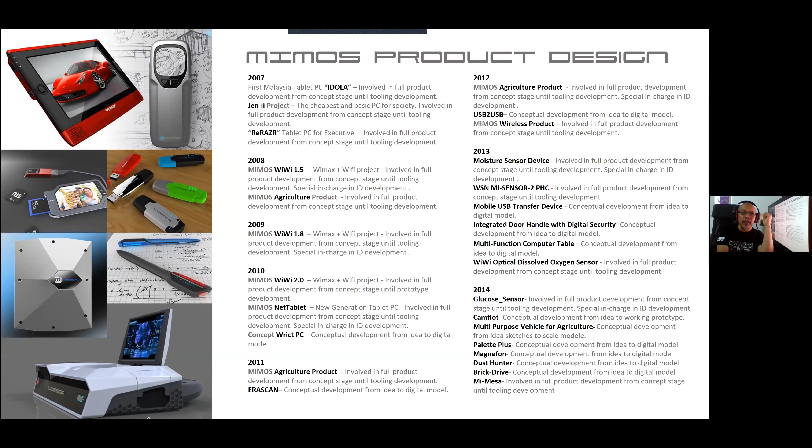A lot of product design. This is also MIMOS, but mostly concept design, not related to IoT, like a bag - just a normal bag, but a flexible bag. This bag received the Red Dot Design Award last time, in 2013 I think.

So other than product design and automotive design, at MIMOS we need to do everything. If they have a request to do interior design, yes, we need to support the interior design, and some architecture work.

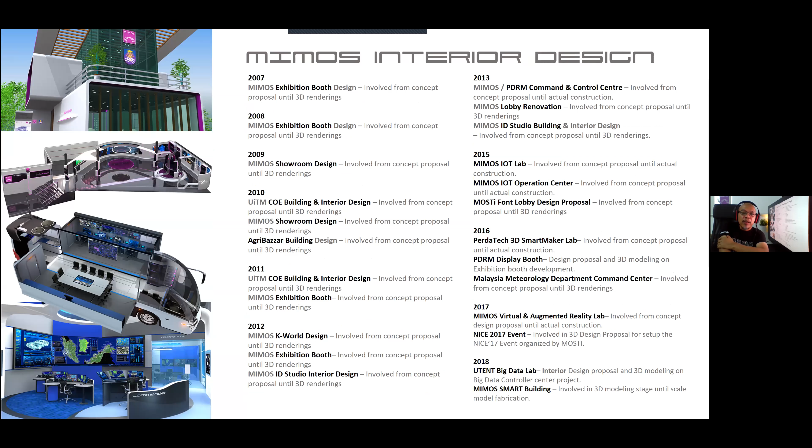For research publications, I'm not writing a full book or publication, but I support other people. They use my work for their publications.

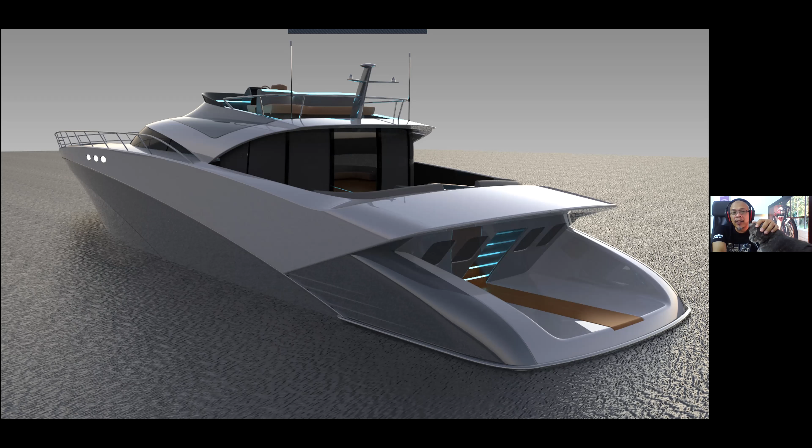All this rendering, I'm using a lot of Keyshot. If you are familiar with Keyshot, it's a good software, you can use it too. For me, I'm using Alias for 3D modeling, and also normally for rendering. I'm using Keyshot a lot, and sometimes VRED, which I normally use for virtual reality.

So this is also my famous design, a lot of people sharing this: the Mercedes sewing machine. Actually Mercedes already produced a sewing machine, I think 100 years ago. I don't remember exactly, but they were producing a sewing machine last time, so I just refreshed their design, but made it look modern with the Mercedes design clue, design influence.

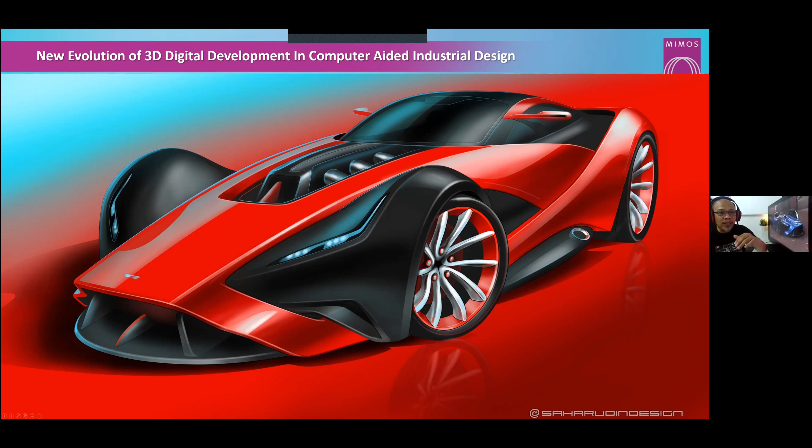Because now we have technology, I just trace the design. If you're free sketching, maybe it's quite difficult, susah. So let me show you the Autodesk Alias application.

Actually, you can use this for sketching digitally. Either you can use Photoshop, I think you're very familiar with Photoshop, but for me, I don't like sketching on Photoshop because I don't have the stroke, the stylus feel. One more thing, you can use Sketchbook Pro, but the problem is Sketchbook Pro doesn't have the 3D modeling tools.

So okay, this is the view for Alias. Actually, for your information, Autodesk Alias is free for students. You can download it, you just need your matric card as evidence that you're a student. So you can download it free and use it for 3 years. For your information, this software, the original price for the student version, the industry price, is 100K.

The price for the automotive industry. But for me, I'm using the lower version, Autodesk Alias Concept, but you can still use it to do automotive design, though it doesn't have features for A-class surface for production. This one also has a price, around 13,000.

Okay, so how to do it, this is the tablet. I need to flip the screen. If you look at the small window, I tip it. Okay.

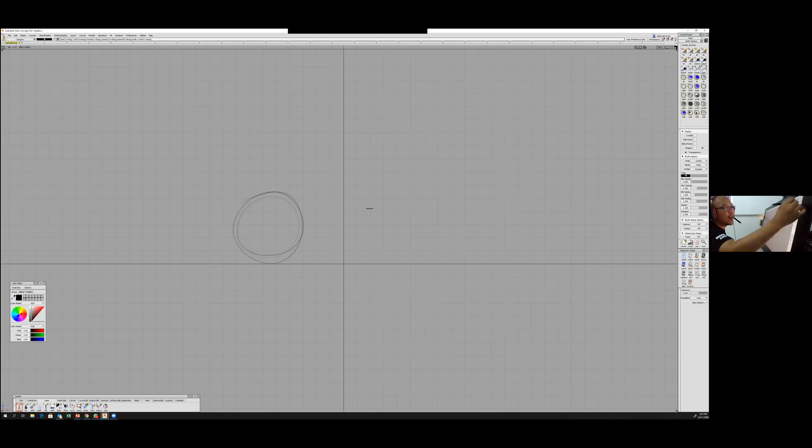It's now default, I can change to pen. Now the icon here already changed to pen. Window, edit, canvas - so the layer canvas layer editor, actually the tools are similar to Photoshop layers. So I can clear, I can create sketching.

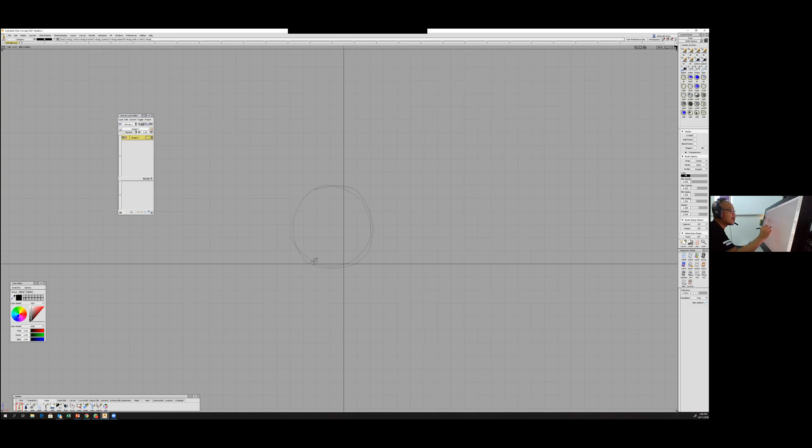Create basic quick automotive sketching, so you can sketch. For me, normally I just do the side view sketch first for automotive to get the idea, because automotive is a symmetrical product.

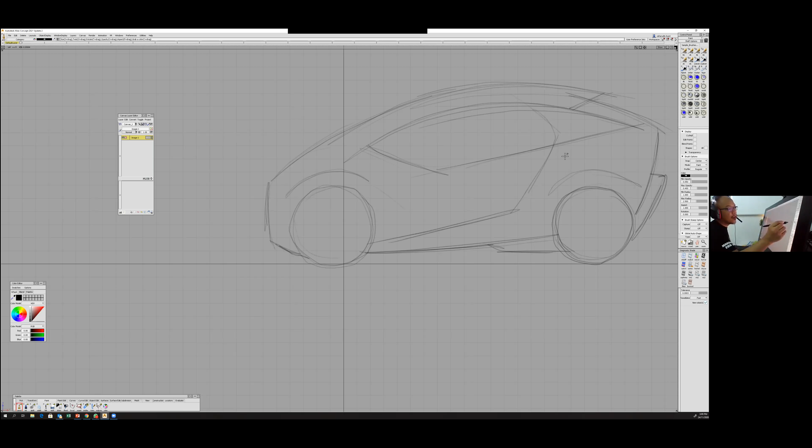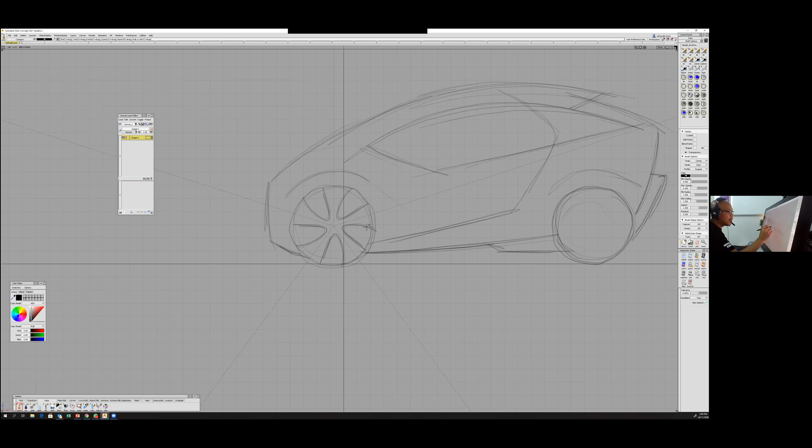So you see the door. If you want to make it symmetrical, bilateral radial, so number 5, I move this to center. If I want to make the spoke, make the rim, I copy to 5 sections. Sketch - so just one portion only I will draw, and the other sections will be copied automatically.

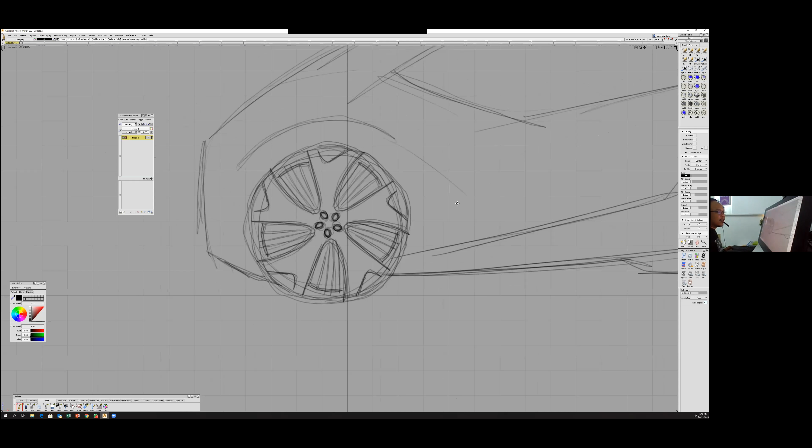Okay, if you want to turn off the symmetry, just turn it off. And then you can clone. If you want to clone, copy the rim, copy at the back. Okay, this is just the concept, so you can brush.

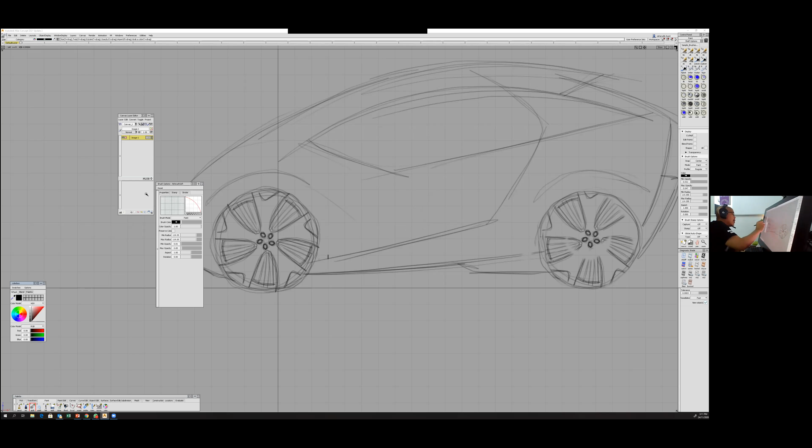Using this brush - this is the size, this is the color. You can color, and then put another layer, so you can color the glass.

Okay, so this is the side view. If you go to F8, the shortcut, actually it's the 3D environment in Alias. So from here, how to construct in 3D. Normally I'm doing how to make the perspective view - I will create some basic construction, then create the 3D sketching overlay from the basic perspective. In Alias, you can use curve.

So I create the curve, and then pick, move the CV. Okay, this is just the simple version - so I can hide it, I can reduce the transparency.

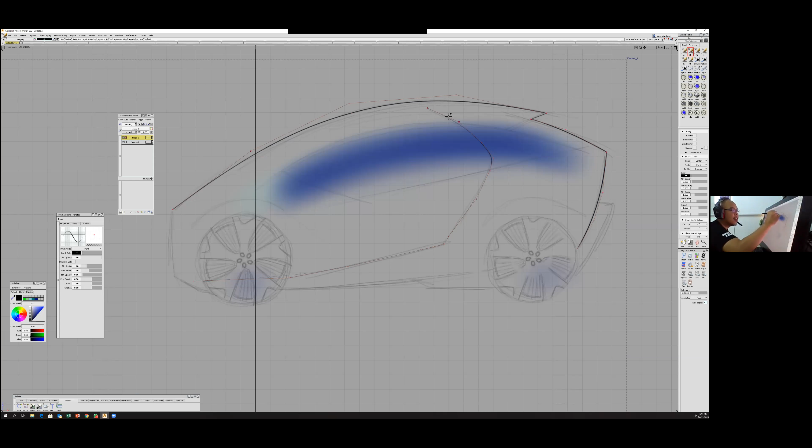Let's say if you want to make the door here, you create the curve, the path. So if I create a line, I can see snap to curve. So I create a layer, create this one inside here.

Okay, the line - next, if you want to make the highlight, still using the sketching tools, I change the color, then snap is still on. What's the function here? This center, snap to center, I snap to edge - so I snap on the edge, so it looks like it's sketching the highlight line.

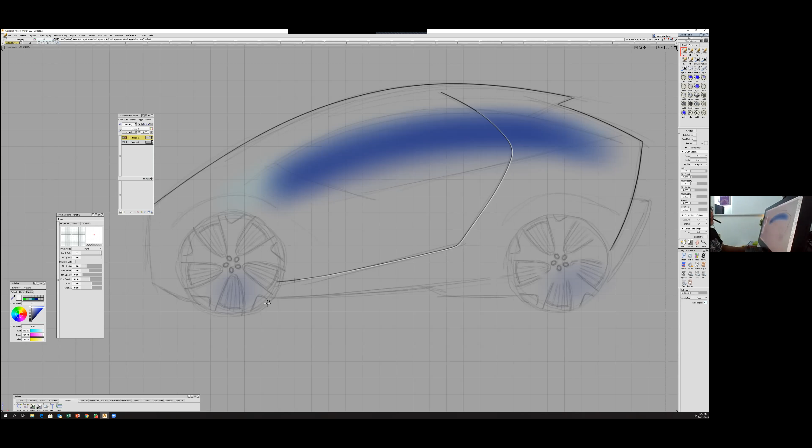So using the same curve, how to create the 3D - this is the basic fundamental in Alias. So I'm using...

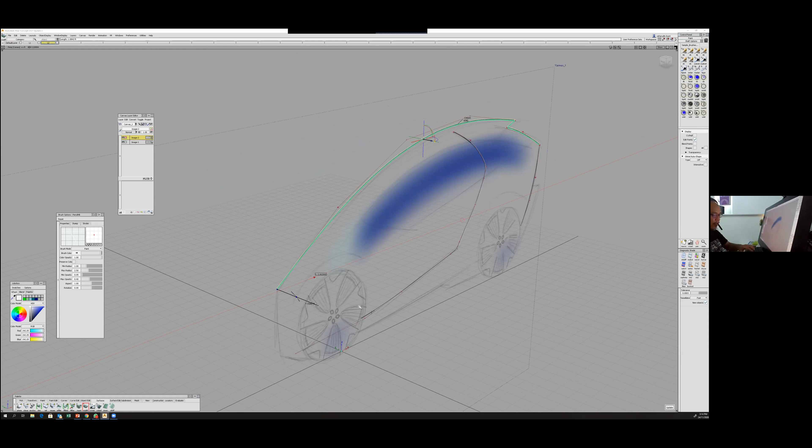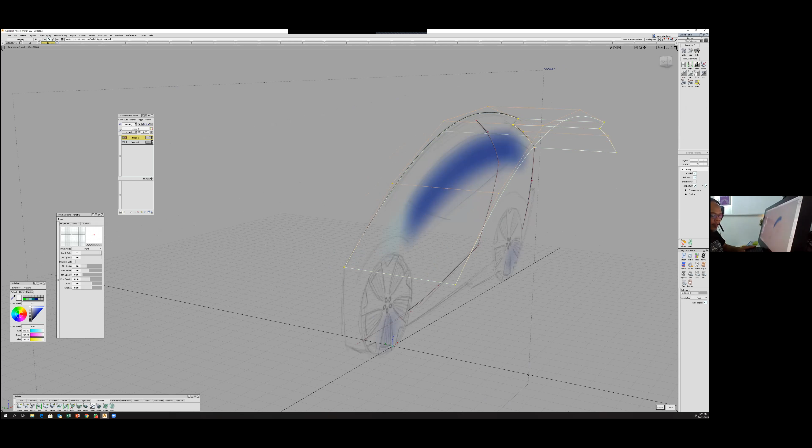Actually it's already now in 3D. I move to default. Okay, so I change to degree 3. Okay, so from here I move - oh, this one, the snap needs to be off. This one.

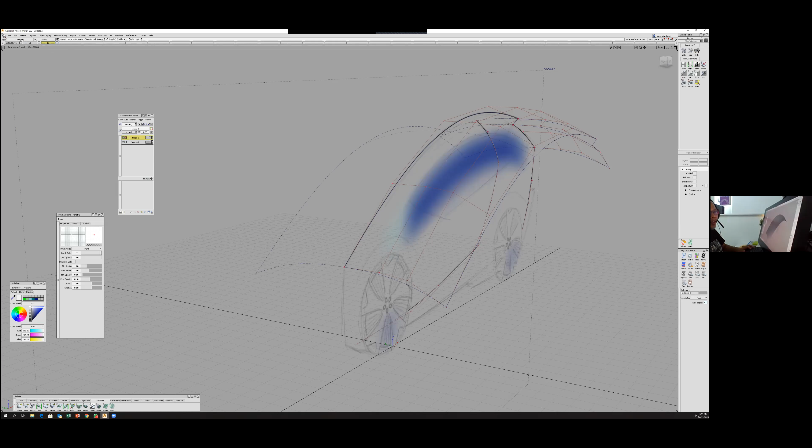So if I symmetry this, and then this is the shading - okay, actually it's already 3D modeling. This is how I construct all the model, my design from 2D sketch into the 3D. So if I change the CV, the point, the highlight also changes. The highlight checking. Okay, this is how basic modeling works in Alias.

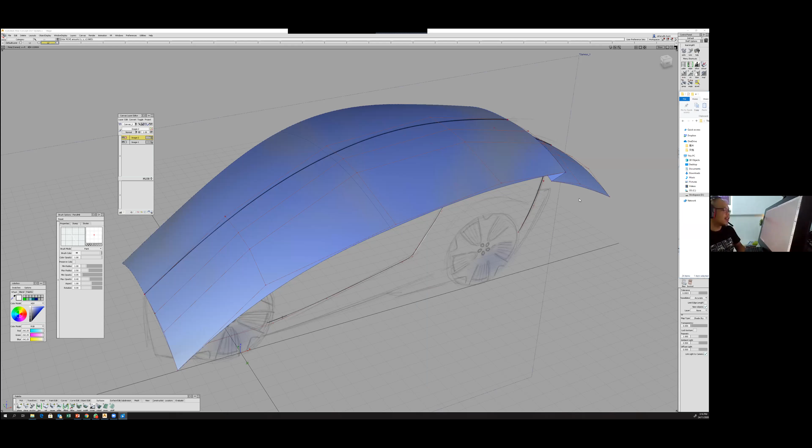You can see this is how I demonstrate from the last 2 weeks for my design talk. I construct first on sketching. I already cut the video, made it faster because of the time.

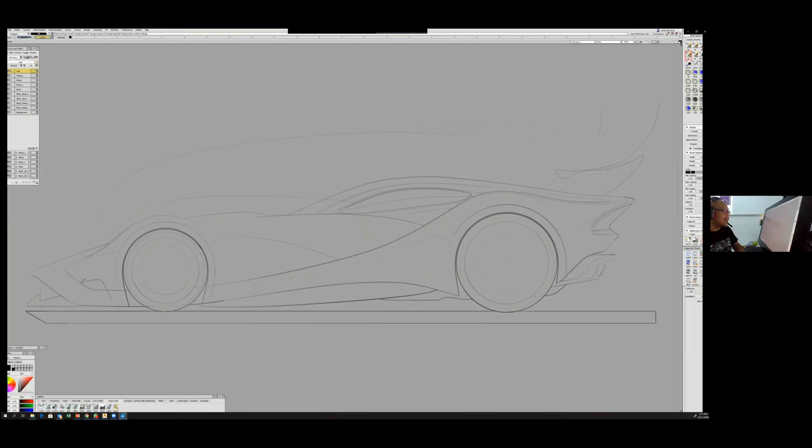So I start with the side view of the sketch. But remember, while you're doing the sketching, you need to consider the packaging. Packaging is the ergonomic consideration - the engine, the driver position, the passenger position.

And then you overlay using the sketching. See, now you can understand why my sketching line looks perfect because I'm using snap curve, snap tools.

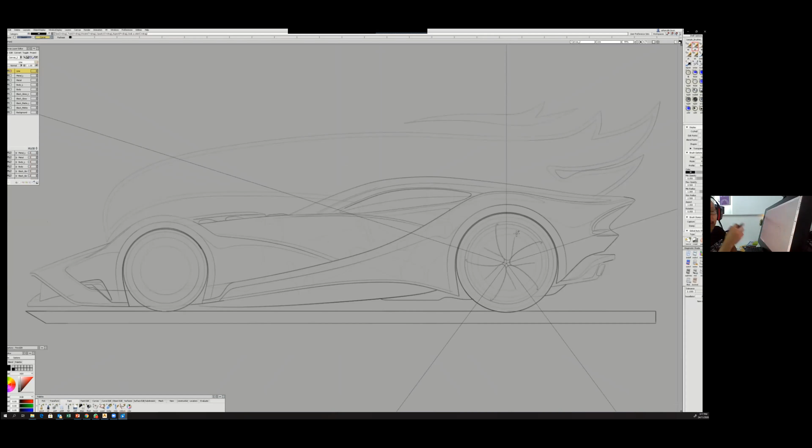So see, and then using the symmetry - bilateral symmetry, and this one radial symmetry. So you can symmetry the object using the radial.

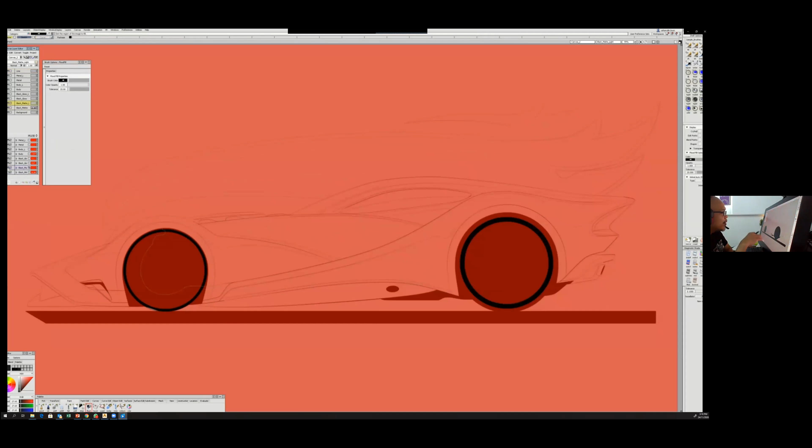See the masking - I didn't show you just now the masking features, how to brush the color. So I'm using the masking.

It's like Photoshop masking, but Photoshop has the issue - the problem is they have a dotted line. So I don't like that dotted line. So with this one you can hide the dotted line, so you can brush.

If you watch this, I'm not zooming in or zooming out, cursor-wise, because the size of the screen is already enough for me to do it like actual paper on paper.

So my brush technique is using the brush and then sketching. I made it a little faster. So I brush using this one, the body color.

I try to use a metallic effect - how to do the metallic effect.

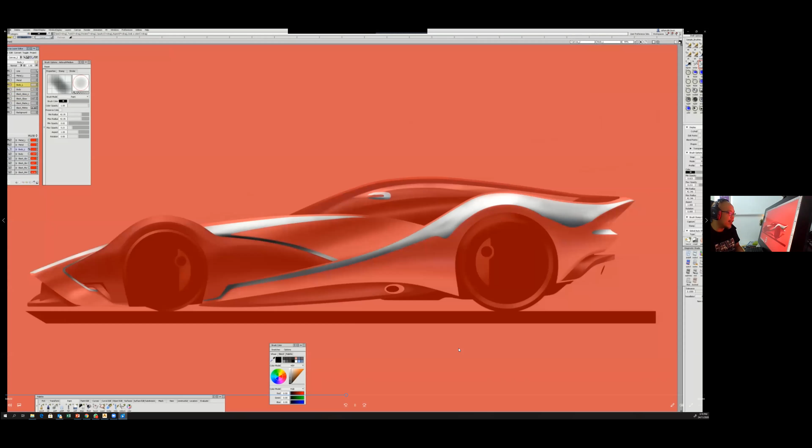And then the rim, using the masking there too. That's why the color looks perfect.

And then this is almost complete. Finally, I'm using the snap to curve to do the parting line. Now I'm doing the parting line, the edge, the radius, all the highlight lines.

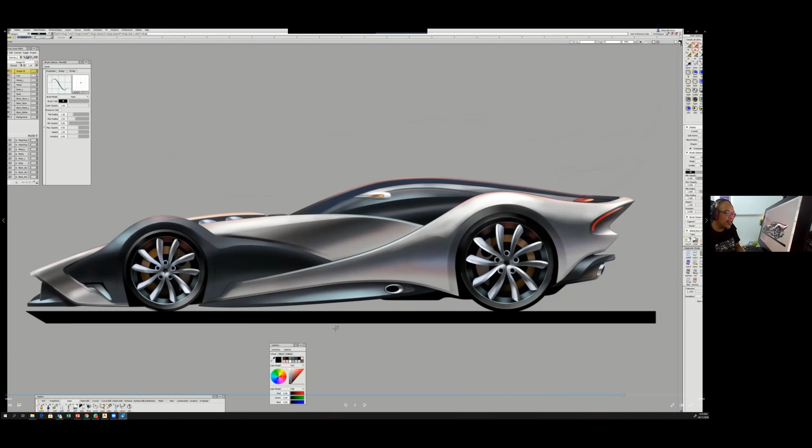Now the background - the brush is in the background.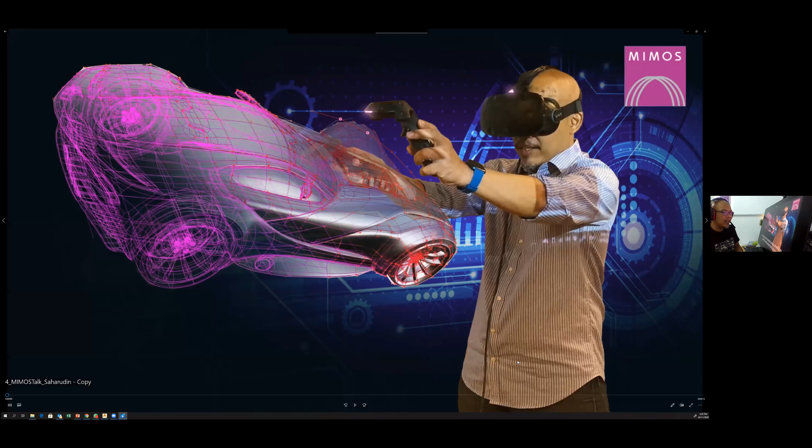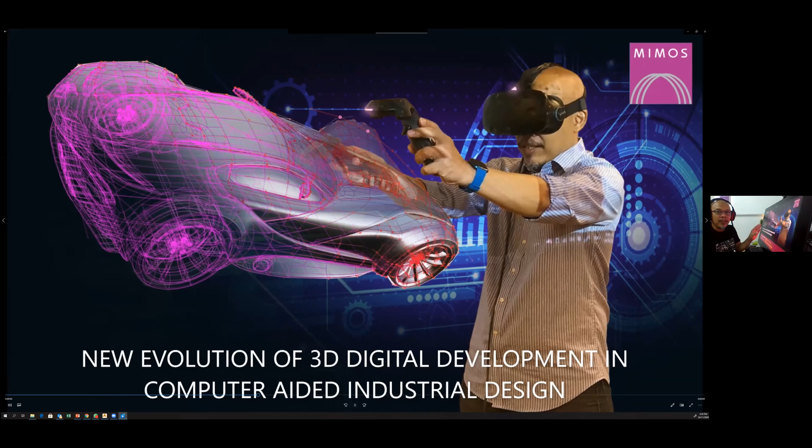So next, I want to show you a short video on how to transfer from 2D drawing to the sketch, how to make the 3D modeling.

So I retrieve the same sketching, but actually I did the sketching at 1:1 size, actual size, because the grid - everything - you can set it as 1:1 size. This makes it easy for me to do the 3D modeling using the actual size.

But this method I'm using for 3D modeling is different from what I showed you previously using curves - this is subdivision. So if you're familiar with subdivision modeling like Blender, Maya, or 3ds Max, it's easy in Alias.

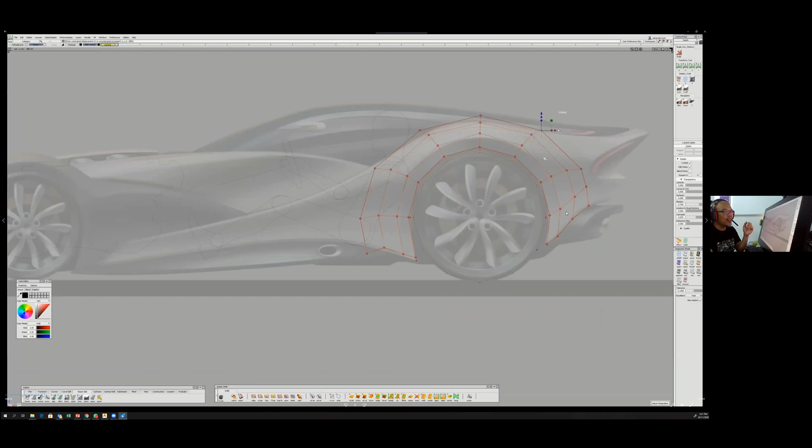For me, this is considered new for Alias users, but it's an easy and quicker technique.

So now, from sketching, how to construct the 3D modeling. This is the reference I'm using.

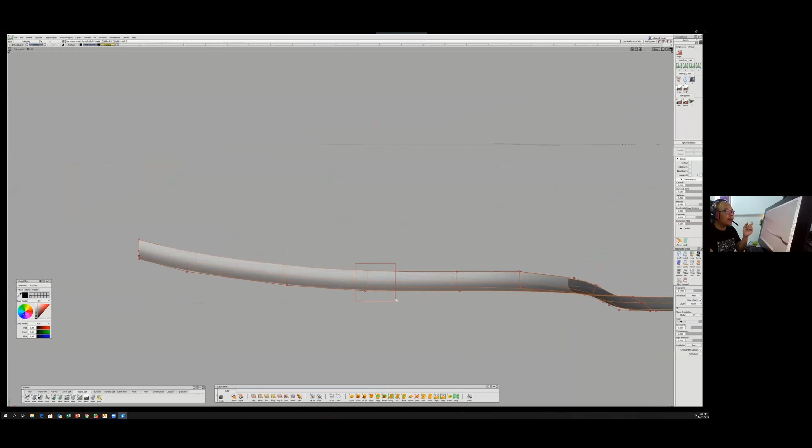But from top view, you also need a basic reference. For me, I'm already familiar with automotive 3D construction, so it's easy for me to do the 3D modeling without the reference. Only the side view is enough for me to do the complete automotive design.

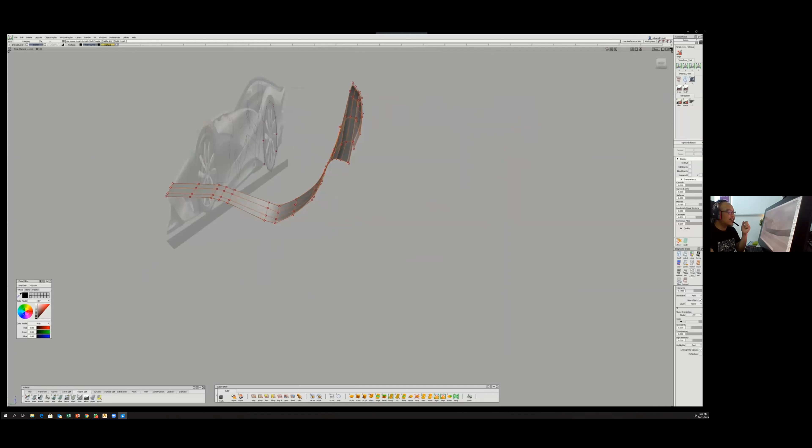So if you look there, sometimes it looks more boxy. In the subdivision modeling method, it's like that - the construction is slightly different.

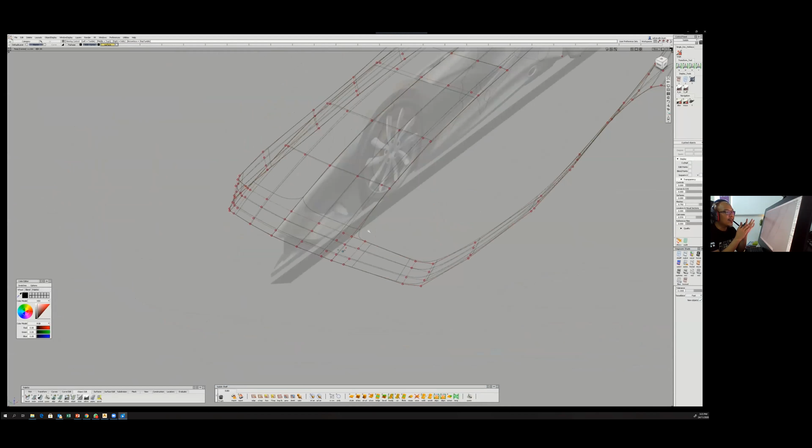I don't know, are you familiar with 3D modeling methods like this? Or I'm not sure. And I don't know what software you are using - either you are very expert in SolidWorks or what?

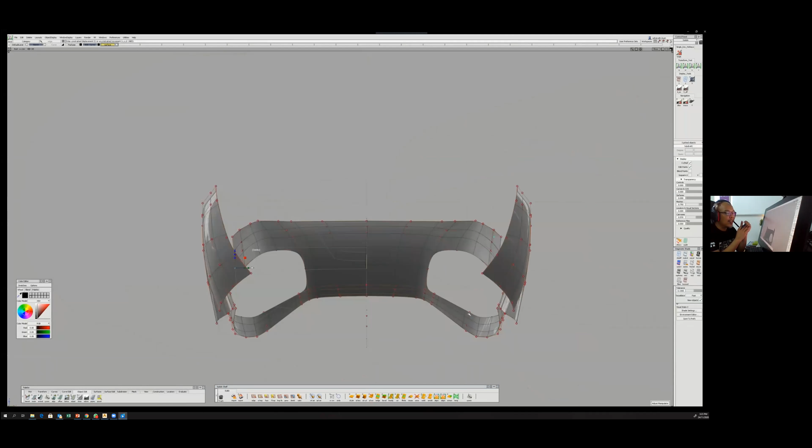Because if you want to do automotive design, make sure you are using the proper software. In the automotive industry around the world, they are using Autodesk Alias for conceptual modeling. For product design, yes, you can use other software like Rhino or SolidWorks, but for automotive design, you need to use Alias.

If you see how easy I construct the 3D modeling using Alias, then using this method, I make it faster a little bit.

Okay, so this is how to make the tail area. I need to stay - so you just concentrate on the left side, one side only. The other side is automatically mirrored.

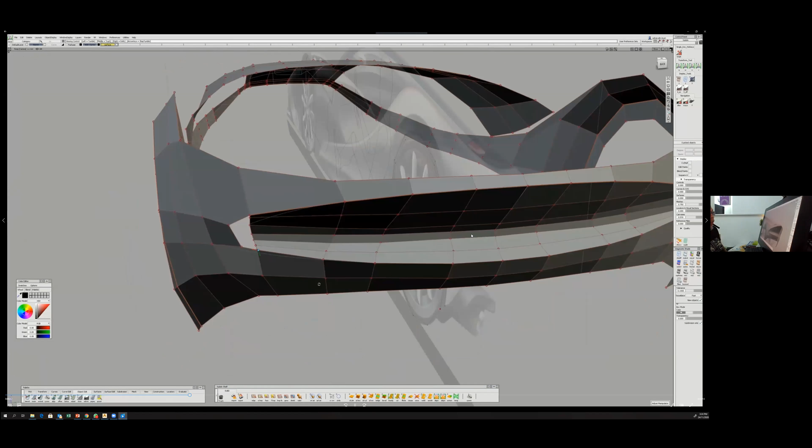So this, I want to make the intersection close. This is the tool - subdivision tool, the palette. And I make the cluster a little bit.

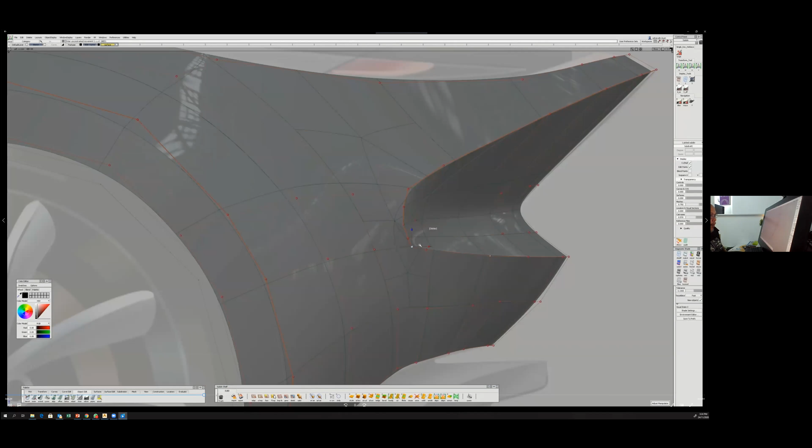Okay, now I do the mirror area, the glass area, side glass. See a lot of pole CV - pole points, the points we call control vertices, CV.

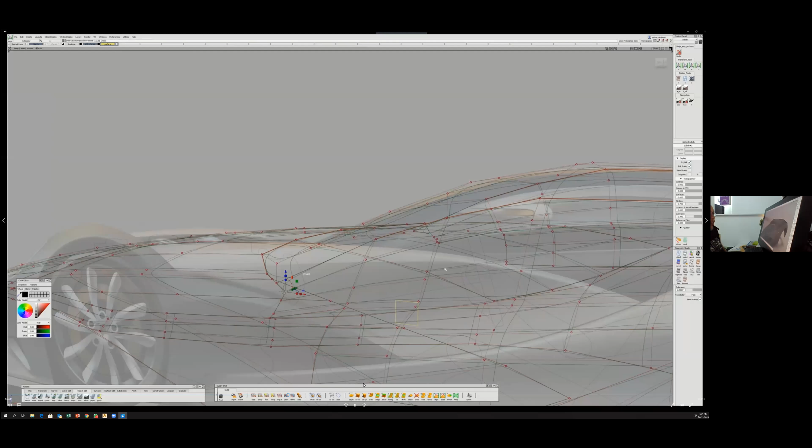Okay, a lot of adjustment, and then okay, so this is still the modeling stage.

I want to skip - okay, this is still modeling stage. Okay, this is almost complete.

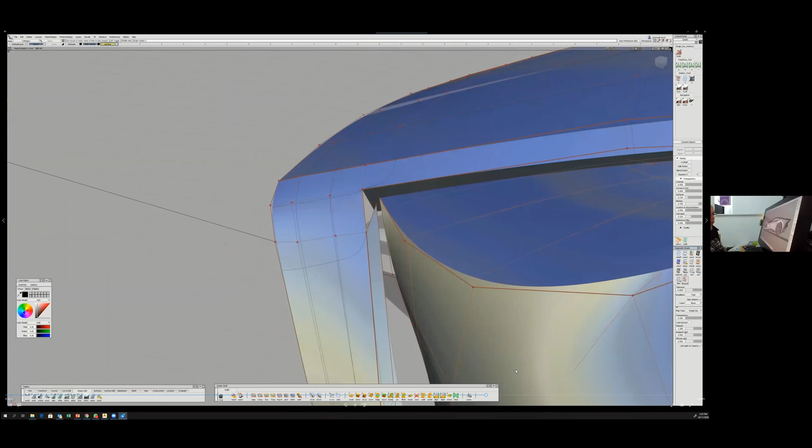Make the corner - the detailing on the corner area. So it's like a sculpture activity.

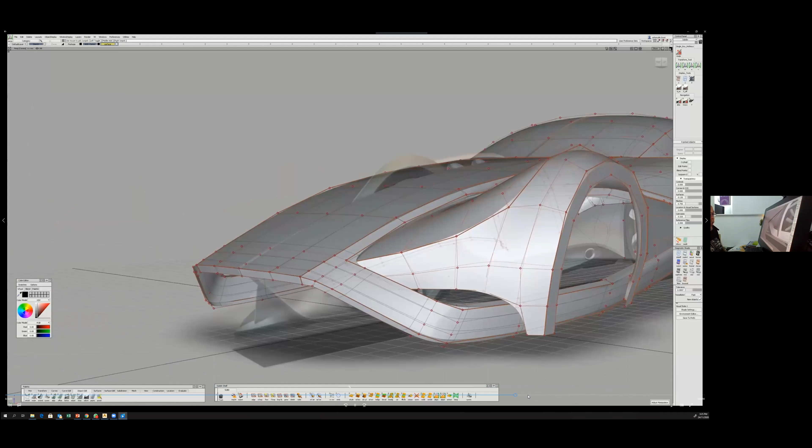So in Alias there's also the advantage - either you can use a manual modeling method like this using mouse and screen, or second option you can do it in VR, virtual reality, but you need a device.

So if you look at the top on the menu, they have a VR, virtual reality technique. So you can do the 3D modeling in VR.

That one is a better experience because you are doing it at one-to-one size, a real car. Right now you're just using your screen to do the modeling, but you don't experience the real one-to-one car.

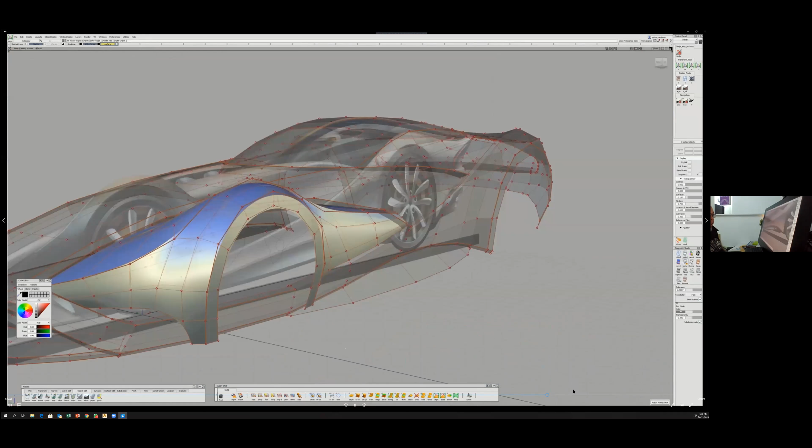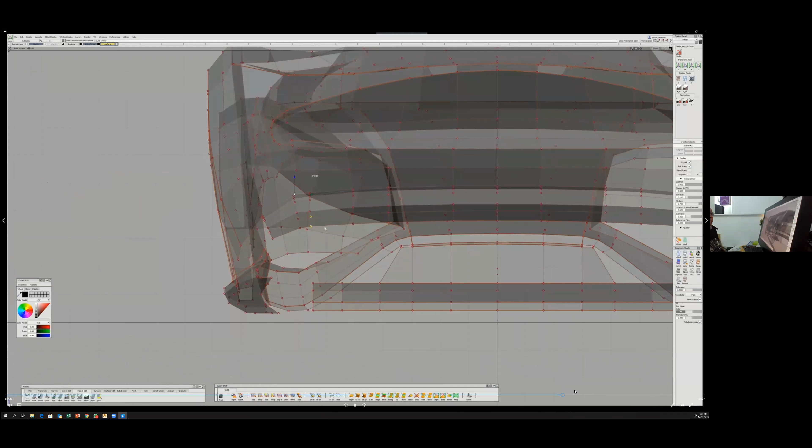If you want to become an expert like this, you need a proper class. Just watching YouTube isn't enough. You need a good lecturer, a good teacher to guide you, because it involves a lot of practicing and coaching.

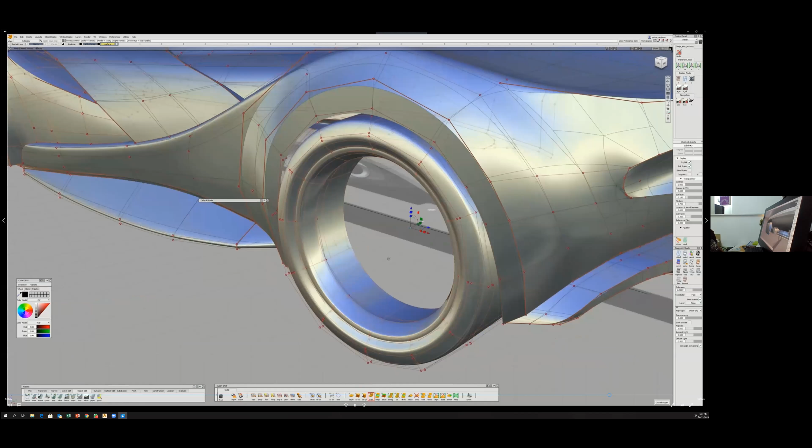So this is how I make the rear diffuser detail, and this is how to make the wheel, to close that surface. Then how to make the spoke. Just now you watched the sketching, but this is how to make the 3D modeling of the spoke.

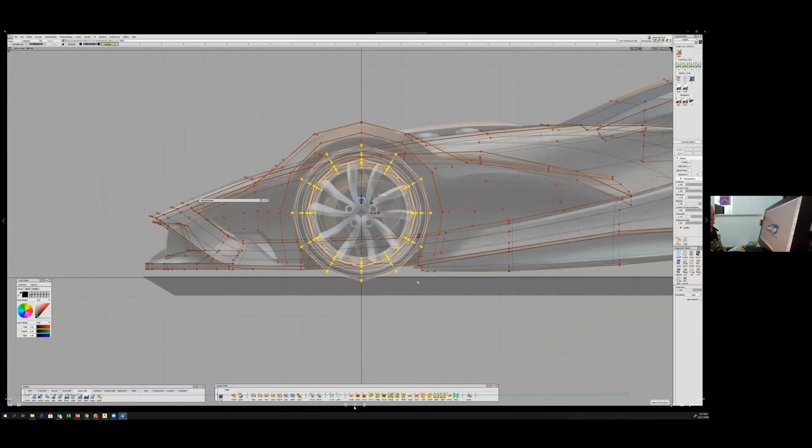Before I create the modeling for the rim, the wheel, this is one of the main features. So now the basic 3D modeling is almost complete. Next step before you proceed for detailing and finishing.

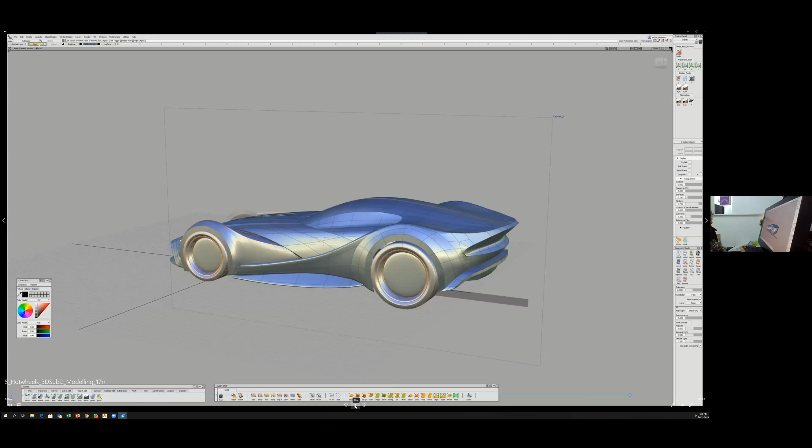You can project your 2D sketching onto the surface. Just now you did the side view, you can project it on this surface, so at least you can view it visually before proceeding to the next development. See, I project from the sketching onto the surface. Now the sketching is projected on the surface, and you can review quickly before starting the next development.

So it's important for you to decide whether you're okay with this modeling, or whether you want some alteration or modification.

This stage, I think, as a student, will be good enough. For me, to complete all of the car, I need 2 days to complete.

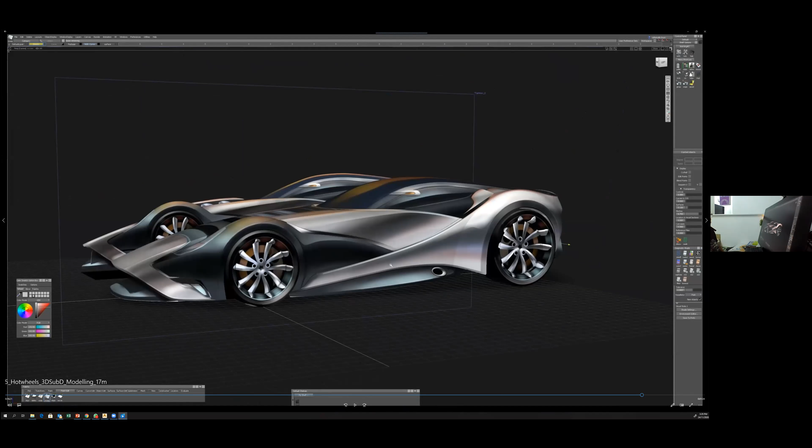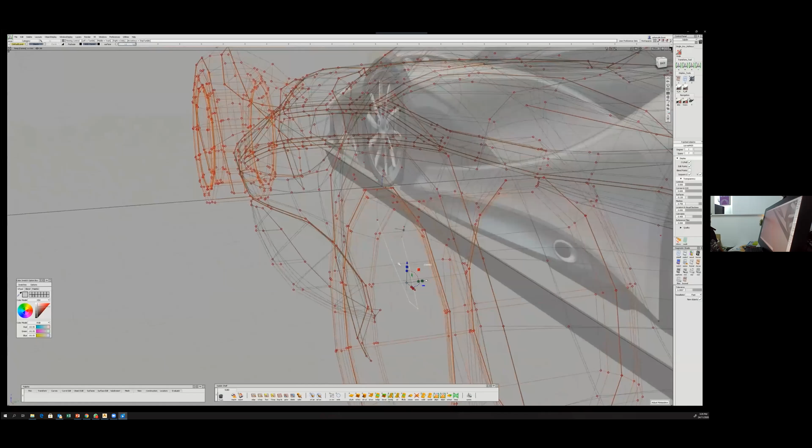So I proceed to create the spoke. Before that, I just project the sketching, so now I decide the spoke is okay. I create the spoke for the wheel, the rim, still using the subdivision modeling technique. I just copy, and then you change one side, but the rest you repeat.

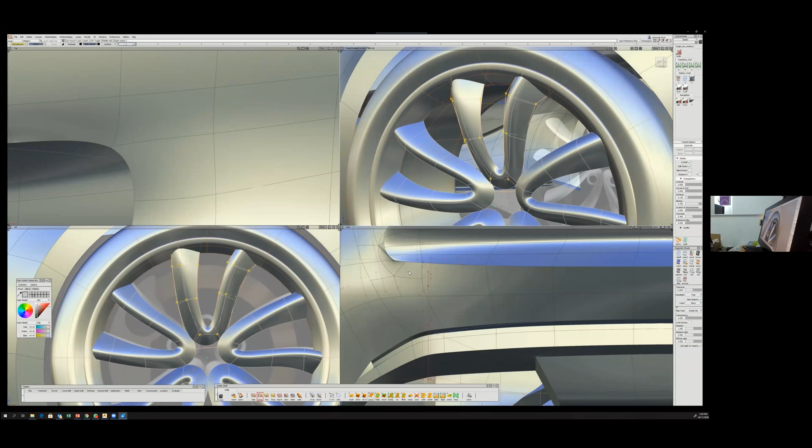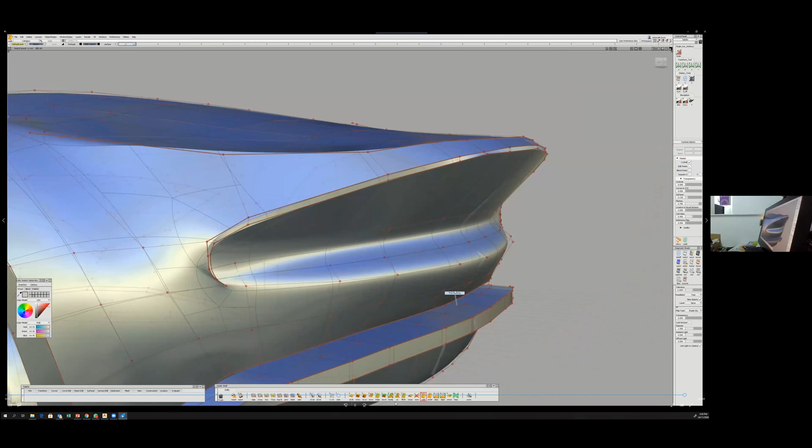So almost complete the basic modeling. So how to make the corner, the edge, the radius. This is to make the finishing, the detailing, but you need to understand all the tools.

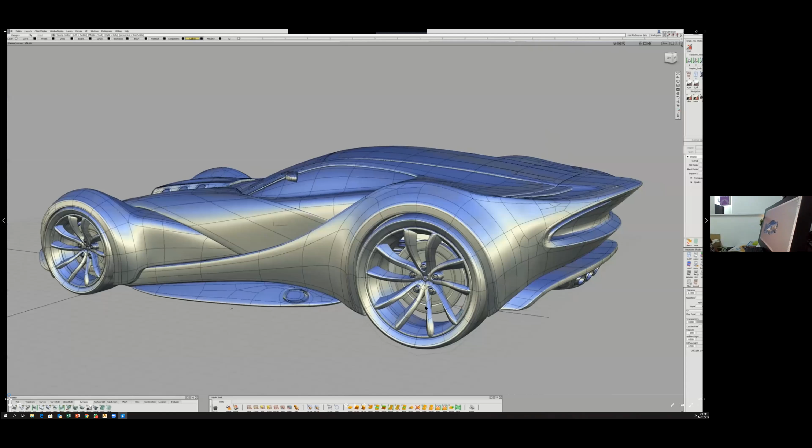So this is the final. I already skipped some of the process, but this is the final 3D modeling. See the detail: the exposed engine, the light, the wing mirror, the tail light, the rear light, the exhaust.

So this is how I evaluate before I proceed for rendering, how the surface finishing looks, the quality of the highlight. You need to check everything, whether it's perfect or not. This is okay, now you proceed for rendering.

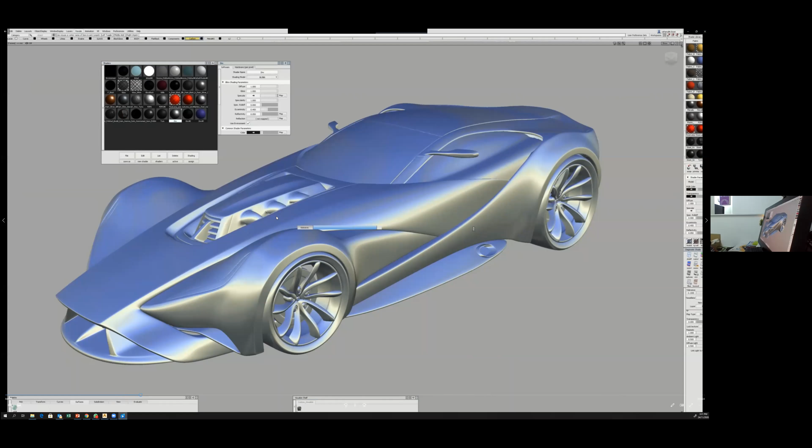How do I make all the rendering look realistic? So this is the trick: I start from Alias, I assign all the material in Alias. After completing all the material assignment, you can export to other applications.

So this is assigning the material. This is the VRED software. In automotive, this is an important tool, an application for reviewing in VR, virtual reality. You do the animation and rendering.

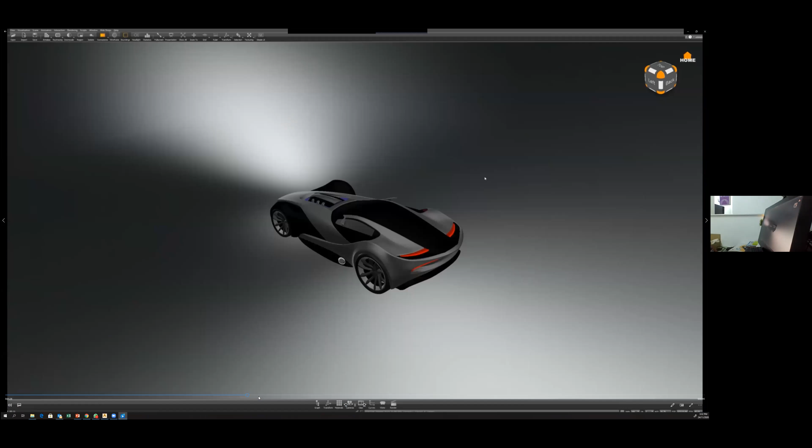So how do I transfer from Alias to VRED and KeyShot? I'm not sure about KeyShot, because to do VR it's better in Autodesk VRED. So this is the data from Alias. I changed the color tuning a little bit, and effects like a carbon fiber effect, more features, more material, and the HDRI environment.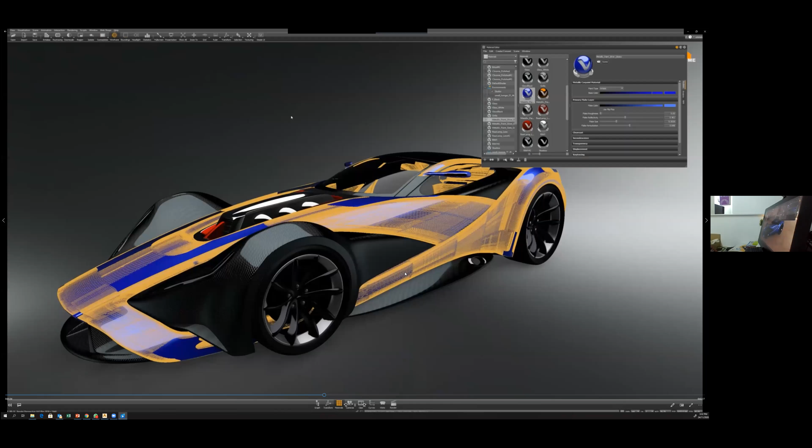I can use the HDRI environment to blend with the color and environment. You can retrieve the environment here, we call it HDRI environment. You can just download it from a free website like HDRI Haven, or use a free application, but it's still high quality.

So you can change the color, orange.

And this is how I view the VR at my house, using the HTC Vive. But actually you don't need the big screen here, the big screen is just for other people to review with you. For yourself, you just use the VR headset.

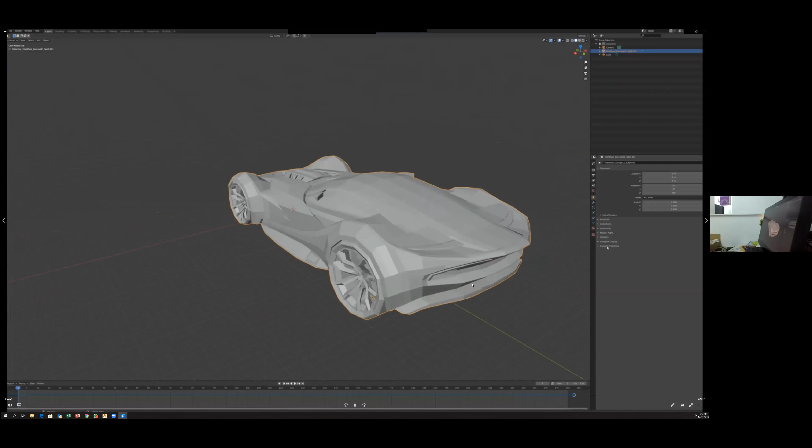And then Blender—why am I using Blender? Because when you work in Alias using subdivision modeling, the data is very light, so you can export it to Blender. Blender is an application for rendering and animation, and most importantly, it's a bridge for the gaming industry. There's a lot of development in Blender and Unity, and I also use Blender for augmented reality applications.

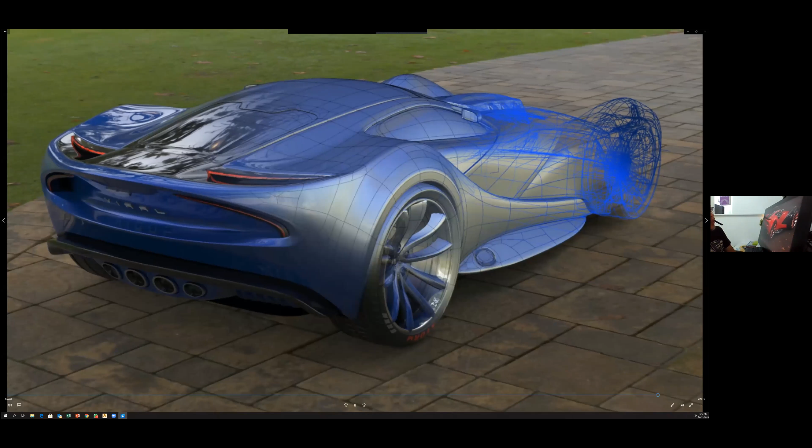This is the final rendering using KeyShot and VRED. So you can watch all the rendering on my Instagram.

So this is the final target for this Hot Wheel project. My aim is to download it into a game platform, so that's why I'm using subdivision modeling. But my son needs to help me, since I'm not familiar with using game console applications.

My son is studying programming, so this game platform uses my design, but you can customize everything. You can choose the environment, and then set it up using your steering wheel. It's like a real game, but you can drive your own car.

So this is the simulation. If you can hear the sound, it feels more real. This is the test track area. If you want to play this game, I'm using a Drift X game, using the steering wheel.